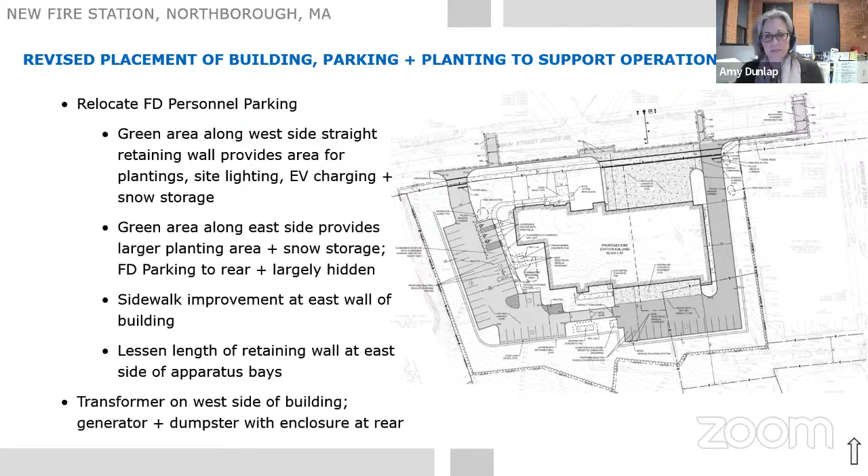The retaining walls, we also presented at the last meeting, and I just wanted to go through them to show you what we're going to be presenting to design review tomorrow. This is the straight wall, which is what we've been looking at, although it's been adjusted for the parking change in the back of the building. When we get to the cost estimate portion, the base estimate is based on a straight retaining wall like this, and then we've got alternates for a couple of the options we're going to look at.

The straight wall isn't really totally straight here - it does set back about 2 feet 10 inches from the base to the top of the wall at the high point, back in this corner. And then the overall height is the 30 feet as we've been talking about.

We did some sections through these wall options to help everybody understand what they might look like. This was something the design review committee had asked us to do to get a better understanding. We presented 4 or 5 options to the committee last time we met, and narrowed it down to 3 different options for further exploration.

The first was this batter wall option. For all of the options we're looking at, the walls on the east and west sides of the site have to be straight walls. There's not enough room between the wall and the property line to batter or terrace them in any way, so those are always going to be straight walls. The difference happens back along the south wall of the site.

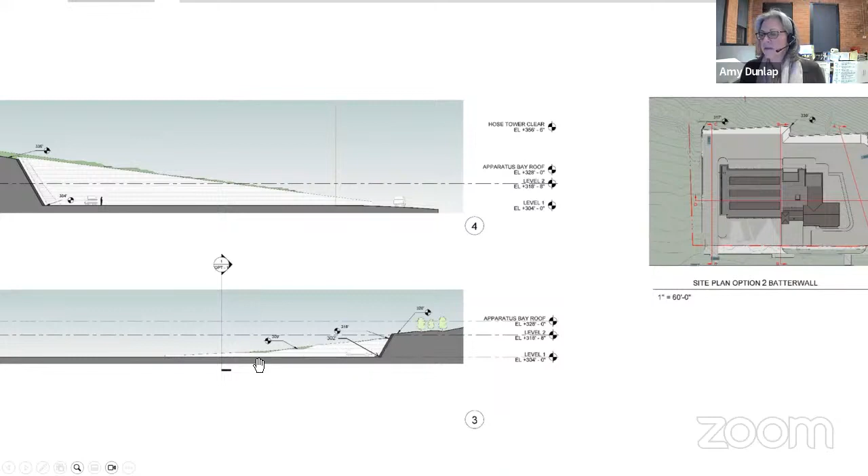This section here is cut right over here—it's off my screen, but it's at the low point of the south wall. You can see there's a car parked there. The site is about 18 feet where this section is cut and continues to go down into the corner where it's about 14 feet high, then continues to slope down along the east side of the property.

Looking at the next two sections, I'm going to show one cut right through the middle of the building in each direction—cutting through from north to south. The street is out here, the hill is up here. You can get a sense of the retaining wall; the grade is at about 304 at that point and 332 at the top of the wall.

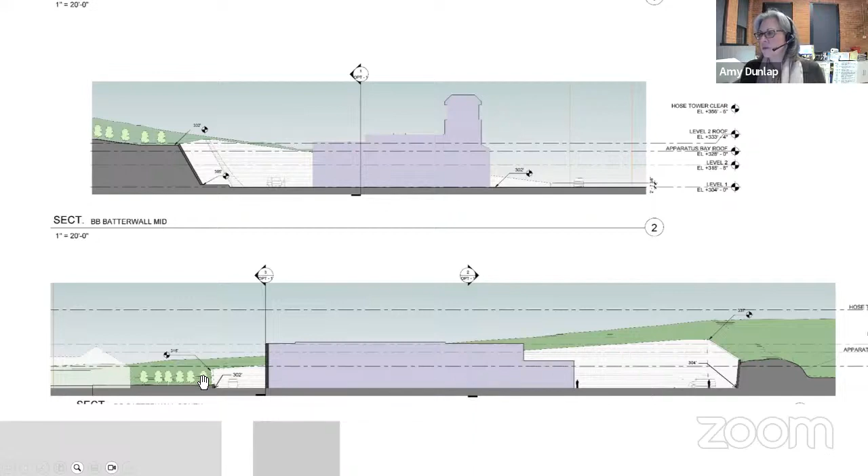This is cutting through the building, looking back at the retaining wall. You can get a sense of how the retaining wall slopes down from one side of the site to the other. So that's the batter wall option.

The next one we discussed looking at a little more is a combination of a batter and a terrace wall. In this case, we have one terrace located right here, and the rest of the south wall is battered. Looking at the section here, if I blow it up, we have the one terrace where we could have ornamental trees, shrubs, low plants, and then the wall continues up.

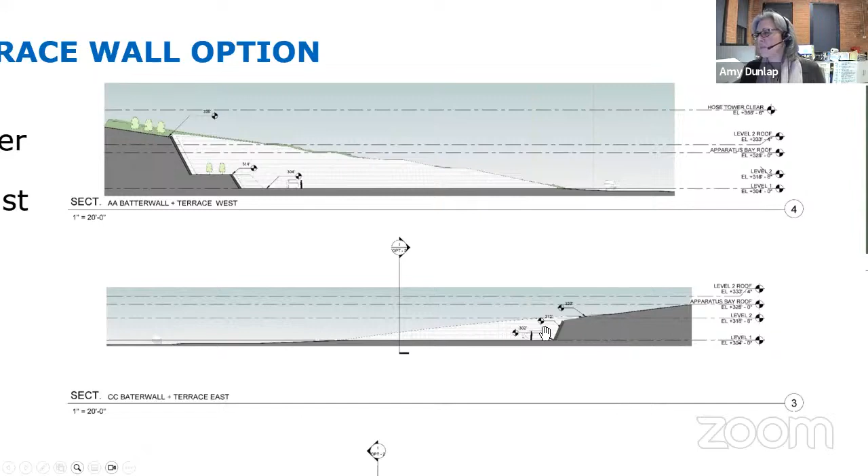Looking at the same sections we looked at before, you get a sense of that terrace here, which is at about 10 feet high in comparison to a person in a car. There's one terrace here with planting, and then we continue up. Again, this is at the low point of the wall.

Then cutting through the building at this point, we're beyond where the terrace happens and we're back to a batter wall at this location. You can see the terrace right here in the distance beyond, and you can see the terrace here in this elevation.

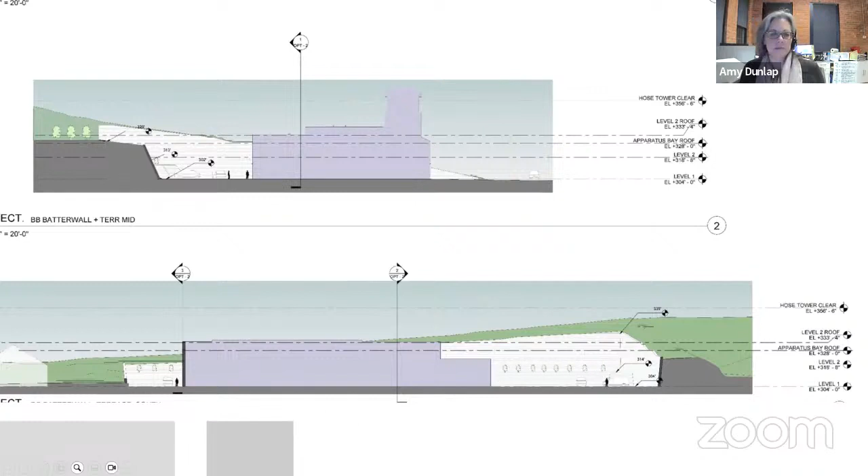This option was developed after we sent the documents to the cost estimator, so we don't have a cost for it. It's something we should discuss when we get to the cost estimate, since the estimate is done at a point in time and design continues. So we don't have an option or cost for this, but we do have one for the terrace option here.

This is the terrace option. We've got two terraces with planting beds on each of the terraces. You can see that in the section here.

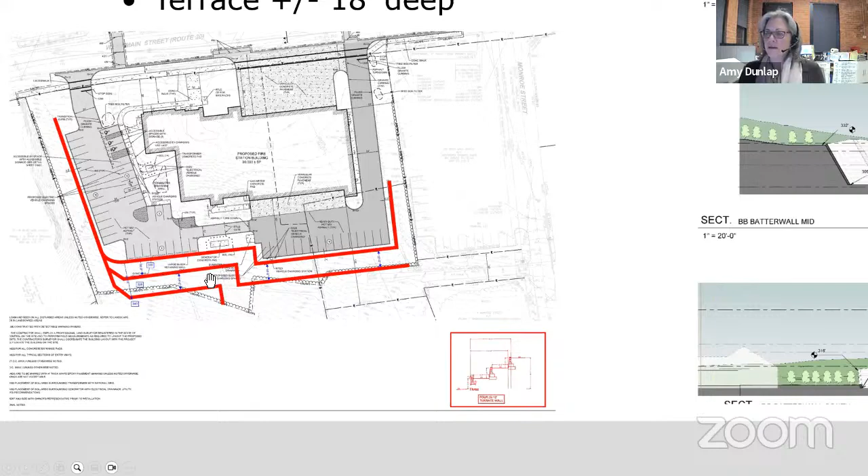One of the nice things about the terraces is that there's access into them from grade. We should note that in the previous slide, the batter and terrace wall option, there is no access into that terrace from grade along the back of the site, since there's a wall connecting the two battered walls. So to access it for maintenance, you'd have to use a ladder from the parking lot area. But in the terrace wall option, you can access each terrace from grade because of how the site is graded.

Let's see if we go to the sections here. The sections do not look right, these are not the right sections. Yeah, that's my fault, I'll find them. Okay, yeah.

Keep going, Amy. I think the next slide moves on to cost. Okay, give me a minute then. Let's see, yeah, I can find them.

Does anyone have any questions while Janet's looking for the sections? I have one question, Amy. What is the height difference in the previous terrace scheme, the little wall connecting the upper battered walls? What is that height that prevents connection to Monroe Street? Let's see, I don't know, Mark, if you know that off the top of your head.

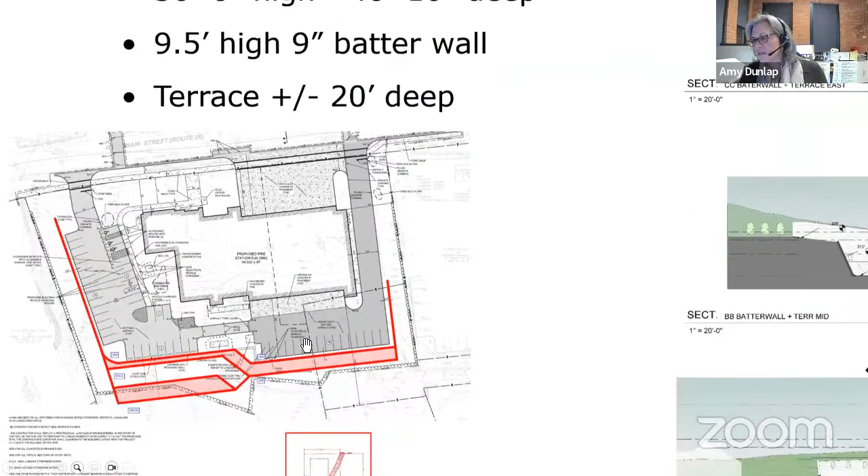These are still fairly conceptual. Let's see, so that's at 328, I think that says, and the terrace is at 313 and a half. Okay.

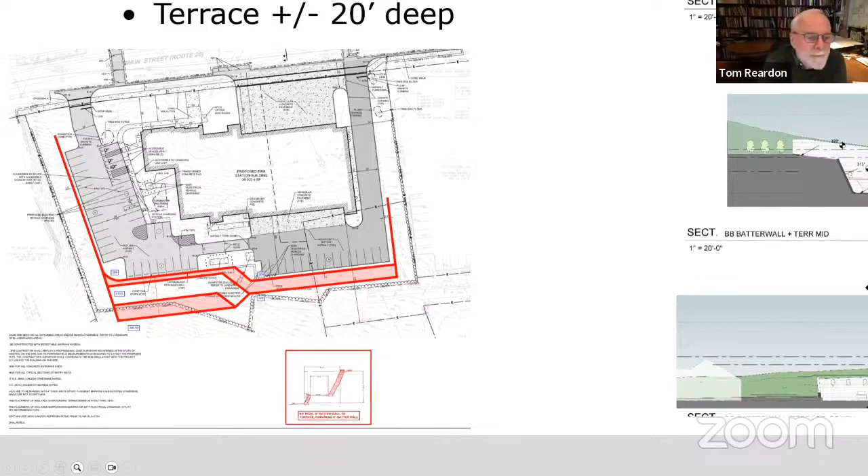Amy, I have them up on my screen. Do you want me to tell you where it is, or how are we going to do this easily? I don't know, I just copied the wrong one, so. I think I will stop sharing for a second and you can share.

And believe me, it's not fancy at this point, but tell me if you see it. The terraces. Yep, okay.

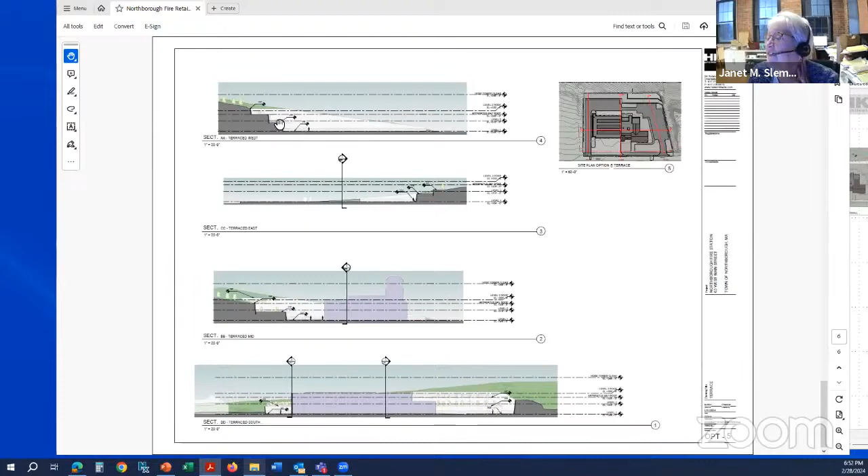So there's the plans, and this is the terrace, the two terraces at the high point, I believe, and these are at the low point. You can see the person. Let me see if I can get this a little bigger for you. You can see the people here, and those terraces are about 12 feet tall, I believe, between them, maybe.

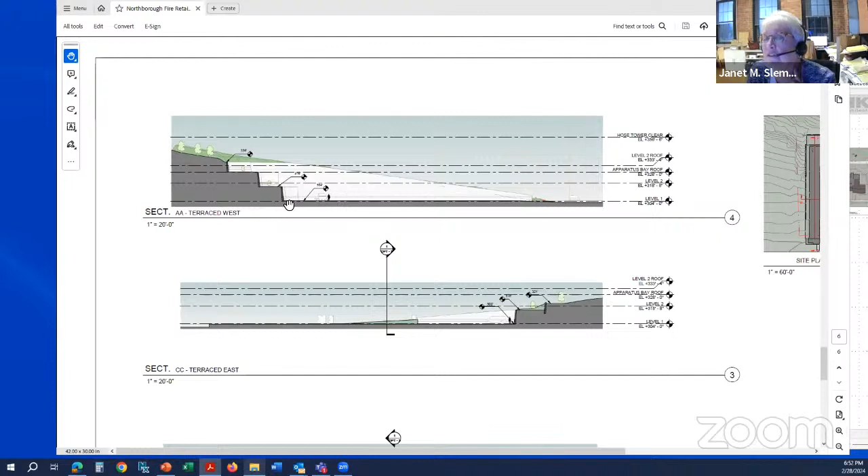And then here's the cross section through the building, and this is what you'd see. So you'd see two terraces here and one on the back side, on the east side. Is that helpful for everyone to see those correctly? Sorry about that. I noticed that Diana has her hand up. You have a question, Diana?

Yeah, I always ask procurement questions, but how does this work with the contractor who would be responsible for building the walls? Do they just provide the landscape surface and then the landscape contractor comes in and coordinates that with them? I mean, the people responsible for building the wall, since we've talked about how that's really a separate contractor or subcontractor, right? How do they engage with this landscape component that's between the vertical pieces they're building and the earth they're responsible for moving?

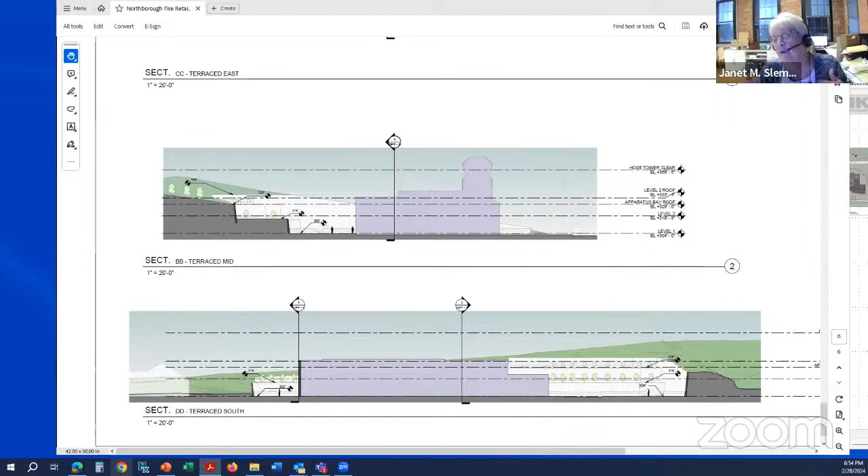We will have to confirm that, but I think it's just a landscaper that would come in. I think there would be two separate contractors: you'd have the wall contractor, and then you'd have a landscaper doing the planting in the terrace beds. And Diana, both of them are under the general contractor. They're both working for him, it's not a filed sub bid at all, it's just a delegated design. So he's hiring that person, and it's up to him to do the coordination of how the things work, that's what I'm thinking.

Yeah, so I'm going to stop sharing here so Amy can go back. I apologize for too many PowerPoints this week. Sorry, John, I see your hand. One or two? Yeah, okay. John, I see your hand.

Chief, yes, a question. Janet and Tom, is this the level of detail that, based on the last design review call, they would be expecting? In your opinion, Tom? Well, we talked about how they wanted to see a 3D rendering of the building that incorporated plantings. Right.

That will happen once we get it resolved. We've spoken, we're already in the works and planning that, but we're going to wait until something gets picked. The town does not want multiple renderings.

I think what we heard was that they couldn't understand the section through the site, so the walls looked too flat or too short to them - they just didn't have that level of detail. I'm asking your opinion, Tom's opinion - does this hit the mark? Sounds like it does for now.

Hey Amy, one last question. At what point in time do we have a better educated view on which of these wall options makes sense and that we're going to go with? After we cost it, or after our design review, or both?

I think both. So we have cost information that we're going to talk to you about tonight, and then we had talked about presenting the options to design review to get their feedback. So I think after that we need to make a decision, because it does affect the planning board submission that PAR is trying to work on and do all their stormwater calculations and all. So we do need to come to a conclusion soon.

Okay, thanks. And the cost. Okay, so we're going to talk about the cost along with Tim.

So we'll talk a little bit about the hard construction costs. The hard construction costs are the actual costs that you pay to the general contractor for building the building, and that is what our cost estimator has priced out at this point in time.

I think it's really important that we all remember that this is the schematic design level estimate, and so it's based on limited drawings that the cost estimator had from the architectural team, civil, landscape, on the MEP, FP, and structural engineer. We had outline specifications from different disciplines, and we had engineering narratives. At the schematic level, not everything is figured out. Not all the drawings are fully developed. Not all the engineering is completely done.

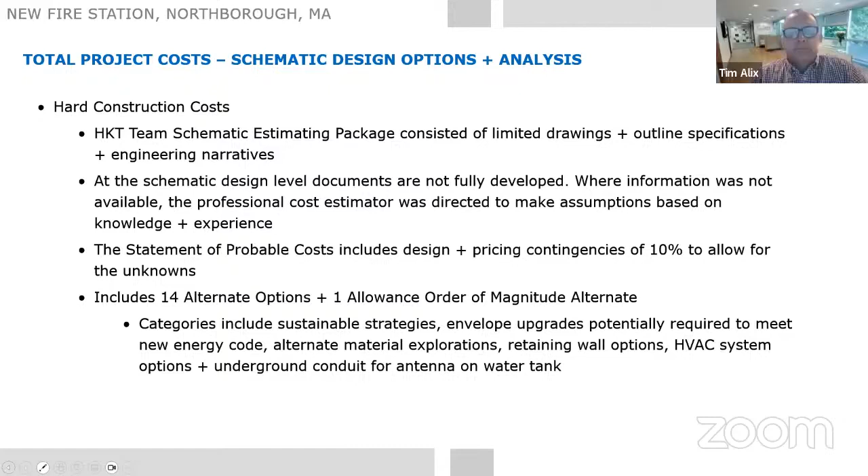And then one thing we did as an order of magnitude estimate was address a request from the fire department to plan for putting an antenna on the water tank on a nearby property. That would require a conduit run from this property out onto Main Street to Gale Street, and then onto that property with the water tank and up the tank.

We don't have a survey for the extent that conduit would need to run, and we don't have any engineering work on that. So we looked at GIS for the horizontal distances. We know there's a significant grade change, so we applied a factor to that horizontal distance to account for it. We looked at Google Earth to figure out the different surfaces we'd be cutting into, whether pavement on the street or the driveway on the adjacent property. We wrote a narrative for the cost estimator, but without drawings, he felt the best he could do was give a range of costs. So that's what we're calling the order of magnitude allowance here.

Does anyone have any more questions on hard costs before we move on? Big picture.

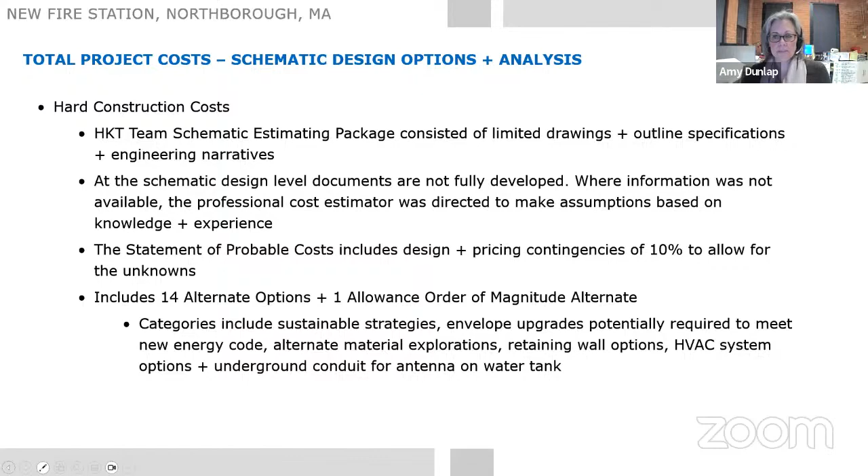Okay Tim, do you want to take this? Sure, thanks Amy. So the other component that makes up our total project cost are what we'll call soft costs. We have basically three buckets we pull those from - these are all the different things not included in your contract with your construction manager or GC, items that go into the building that you use for the program.

So furniture, fixtures, and equipment - those furnishings, AV equipment, security equipment, telecom, those items.

We also have fees and expenses - the design fees, all their consultants, your OPM fees, commissioning if you chose to commission the building. Any kind of, we'd have a line item, hopefully we don't dig into it, but legal costs. Certainly we'd have some utility assessments, and then some costs during construction for material testing.

And then we have contingency for actual construction. We'd have basically a percentage of the project cost that we'd carry for those things that come up during construction - there's always something that comes up.

And then we have another contingency that we call owner's project contingency, which a lot of times is designed for additional consultants that might be required to be brought on, but it's kind of a separate category we carry that isn't necessarily directly related to any kind of cost of implementing changes to the work.

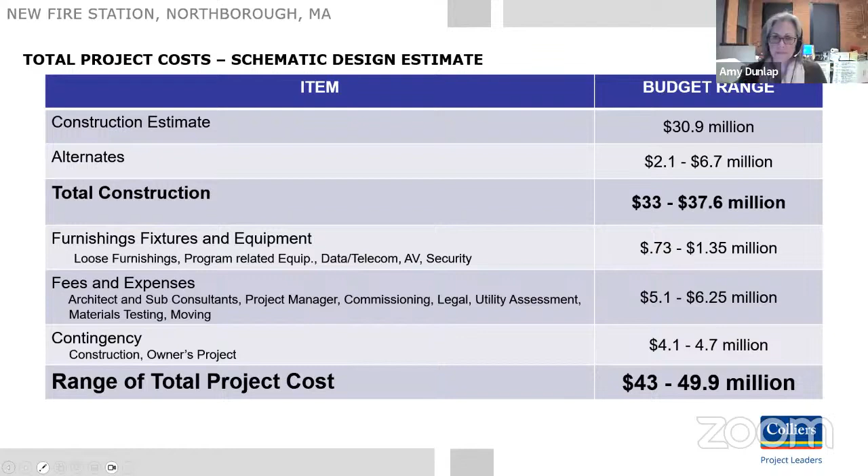So there's a lot of numbers, a lot of ways to look at it. But big picture, I was kind of surprised we were as close as we were, given the fact that the program has obviously changed. The site issues have caused some costs, but we're still pretty close to the number presented back in 2019 with escalation and adjustments. Any other questions?

John, for Janet, your line items for loose furnishings and program-related equipment - mechanicals, transfer switch, generator, that stuff would be in your construction cost. Program-related equipment is really about things like treadmills in the gym space, beds in the dorm area, telecommunication equipment, AV rack, and kitchen supplies and equipment. Got it. Yeah, if it's built in, for the most part that's included in the construction cost estimate. So if we had some built-in shelving, that wouldn't be furniture necessarily - that would be built in as part of the construction estimate.

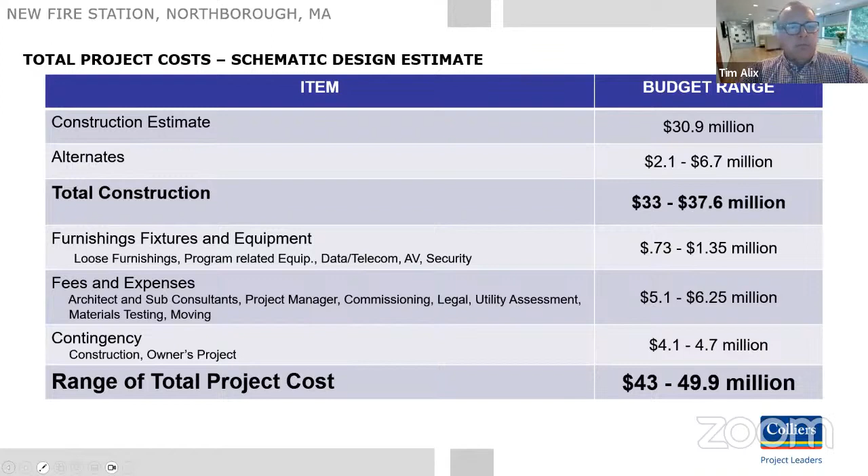Anything else on this? No, I think then just talking, Amy would take it and Janet would take it to the next level, to talk a little bit more in depth about some of the alternates that they had alluded to earlier. Okay, Janet? Amy, I'm here. Sure, she's going to lead this one.

So we put together this slide to explain the alternates. As I said, we grouped them into these different categories, so we've color coded them to help you get a sense of the categories we've got here.

So we've got the green alternates, which are the EV-ready charging stations, the PV, and the green roof in a little section of the building. But stepping back, the numbers here are estimates, and they're just for the hard construction costs. Some of these might also require additional soft costs. Some of them, like the antenna for example, we would need additional survey work to nail that down, and a little bit of additional engineering work. So it's not really in scope - this is just the impact to the hard construction costs, and they're approximate based on the level of information we were able to give to the cost estimator right now.

So we've got the green options, the energy code upgrades, which are upgrading to triple glazed windows. In some cases, if we go to triple glazing, we have to actually move to curtain wall because the storefront system can't support the triple glazing, plus adding some additional insulation in the walls. So those are things we really don't know whether or not we might need yet, but we want to have an idea of the order of magnitude so that once we get the model done, we can decide whether or not we need them.

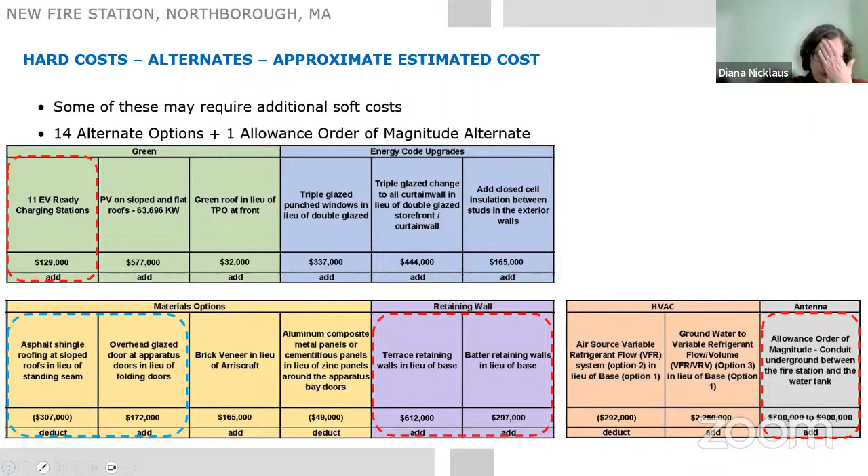So I do think, I know you guys need this number, you need the information on what to do here. To what extent are you going to carry alternates in the documents moving forward? Obviously you don't want to have a lot of them, but...

Well, I think on this one, we're going to show that we have conduit going to 11 different spots, and showing that you have a minimum of 6 that we're going to carry in our construction number, but we're hoping to get grants, and those locations would be identified. I would think that would be enough for the planning board to sign off on. Yeah, and then you can determine - usually they're an alternate - if you can go with 11.

Double-sided chargers that go between a spot or something, so maybe there's only 6 towers for 12 spots, I don't know.

Certainly if you can pursue grants and get them, whether it's reimbursement, or sometimes it's a specialty contractor that comes in as part of that grant who installs them, then you have your operational cost with a service agreement with the provider and that sort of stuff. It gets complicated, or it can get complicated.

But I think as far as the permitting process, that's why we need the decision for the planning board. So if the intent is to provide some at a minimum, but eventually hopefully we'd be able to get 11 or 12 at some point to show where they're located. Hopefully it would be enough information for them to approve the plan. And I don't know, Amy or Janet, if that gives you guys enough information.

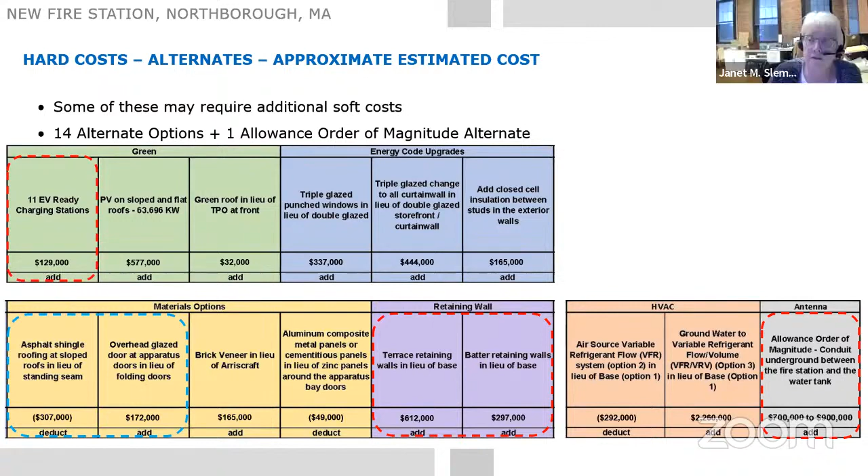Just to remind everybody, there's always going to be straight walls on the east and west sides, period. We're just talking about the southern wall, the rear wall, for that added cost, so just keep that in mind for folks, nothing else will change.

So the battered at 300, we'll say, and I'm just picking a number, it's not based on anything, but if it was, say, 450, you're talking, okay, that's between the two, it's $150,000. If you really don't want the straight wall and you don't want the terraced, really that's what you're deciding between at this point. Is there any real advantage to the battered wall besides the setback going back?

Just the way it looks. Well, I think you need to consider how much shading is provided, a straight wall versus a battered wall, because you have a high southern slope in the rear of the site. I suspect the battered wall at a greater angle might allow more sunlight to penetrate to the back of the building in the parking areas, but maybe Mark has done some solar calculations here.

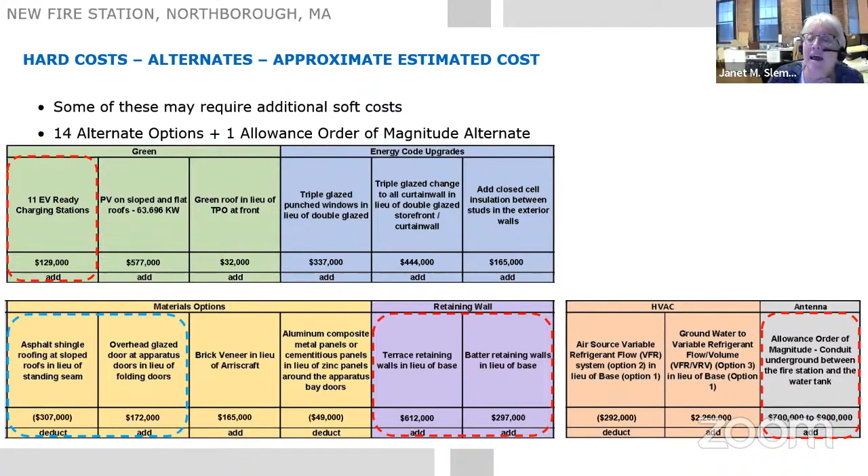I don't think so yet. Amy, could you just go back for a second? I think there are some renderings for just a second, just come back up, because it helps for people to have a visual on these again.

So this is the straight wall. At the high point here, where we have the 30-foot high wall, the wall steps back it's actually about 2 foot 10 inches from the base to the top of the wall.

And that's the base cost estimate number. And then this is the batter wall. Just thinking for a minute.

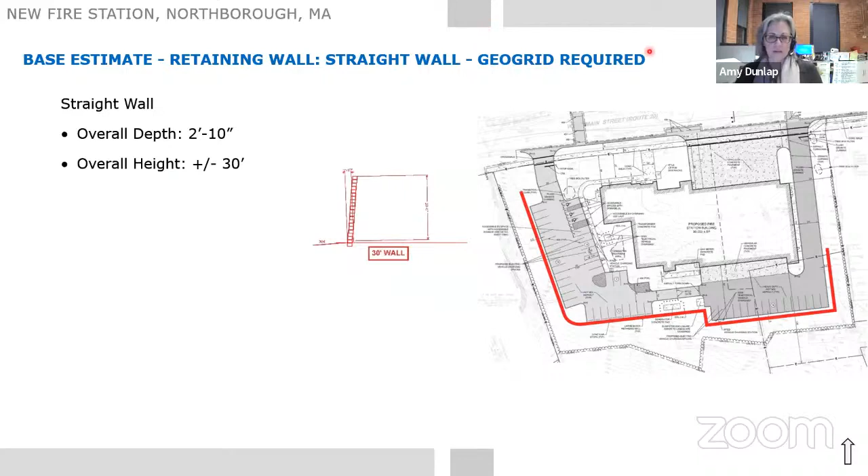So the base wall, Janet, has GeoGrid. GeoGrid is required along the entire wall, which is one of the things that adds to cost here. Where we have the batter wall, we need the GeoGrid on the east and west walls, but we don't need the GeoGrid back here.

So just so everybody understands, the GeoGrid is something that as you build up the wall, you have say a 10-foot, 12-foot, 15-foot mat that goes down and it gets interlocked between the blocks and then goes into the soil material about 10 to 15 feet. So when you backfill on top of it, it's helping to hold that wall in place. So what that requires is more excavation in order to build that style of wall. So it's more earthwork, it's just more labor, it's more money.

Will we get some details on the base construction cost, particularly in this one? I'm curious what the cost estimate is of the base wall, the straight wall. I don't have that in front of me. It's sort of buried, it's not so easy to pull those numbers out.

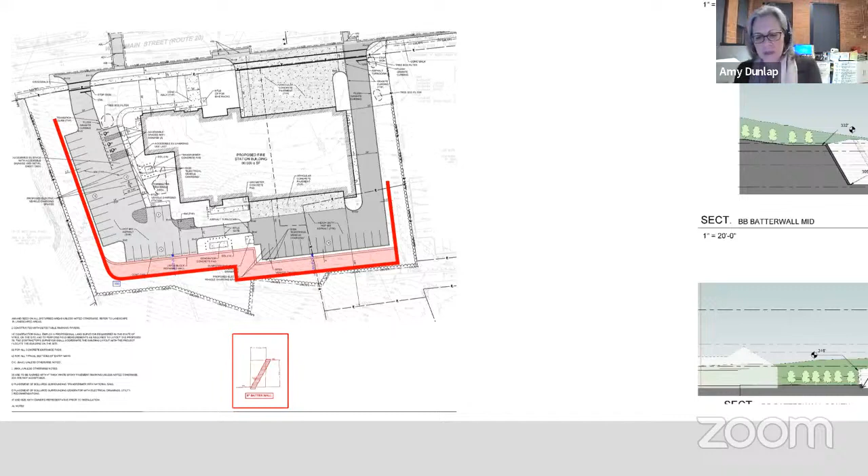I'm looking quickly to see if he has a deduct number, Janet. Obviously we can't deduct it, but it would be helpful to understand, are we doubling or tripling the cost with the $300,000 option, or are we adding 5% to that? I think you're adding - I'd have to really dig in, but I thought I saw that the base wall was about $600,000. Yeah, but that's before adding any of the general conditions and everything, but yeah, you're right.

John, I just want to remind people that some of the feedback on one or two of the community meetings where we had some of the earlier diagrams, the idea of the specter of a large wall, we got a lot of feedback on in terms of, whoa, that's pretty big. So understanding that the east and west walls are going to be straight and we can't play with them that much, there was a concern of the magnitude of the look of what's going to be there. Now mind you, the building's going to block most of that view from the street.

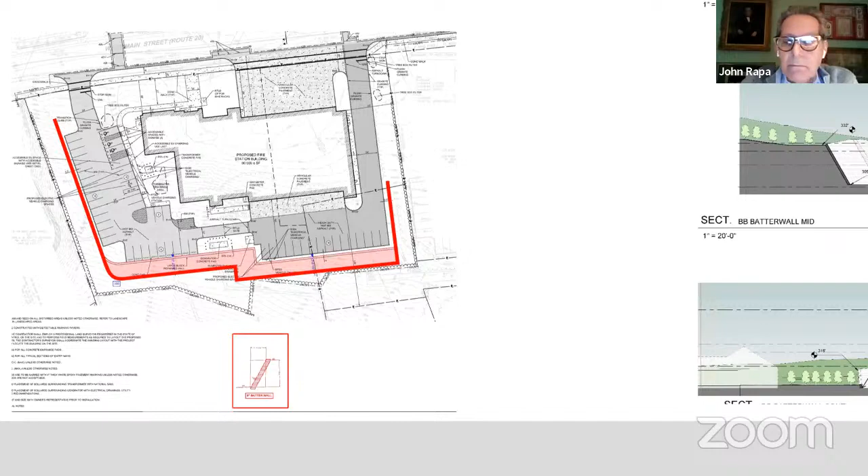Just my batter wall observation - it's also approximately a 70-degree angle, which is the altitude of the sun on June 21. So this would allow you to get some sun in the back. As the sun gets lower, you're going to get more and more shading, especially for the employee parking.

So Tom, your preference would be? Straight walls on the side and battered in the rear - this option right here that we're looking at. I'm gonna take your recommendation on that, that's what I'd go with. Yeah, that's my leaning. I think you can justify that you really don't see much of that, the building is blocking most of that rear retaining wall. And it's really just on that public parking area where you would see it - that would be your biggest opportunity to see it.

And I concur with that, Tom - it's also worth the premium of the cost.

Okay, Captain, where are you? Captain's there, he's just hiding. He's staying quiet.

I am all for the battered wall. I don't think we should look at the terrace wall if it's going to be that much more, because we're already looking at a large price tag for this project. I agree. So by agreement, the battered wall? Yes. Okay.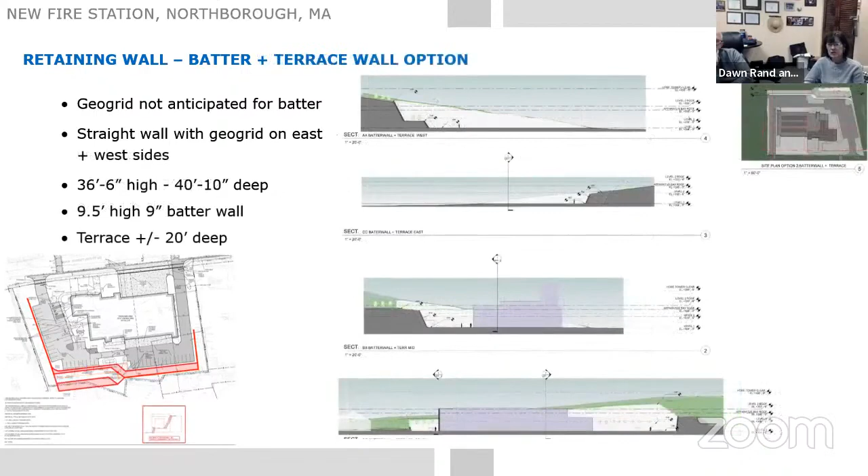All right, that takes us to the - oh, the Don, tower, antenna - excuse me, Don, I think Neal had his hand up. Oh sorry Neal. Jeff, you got your hand up?

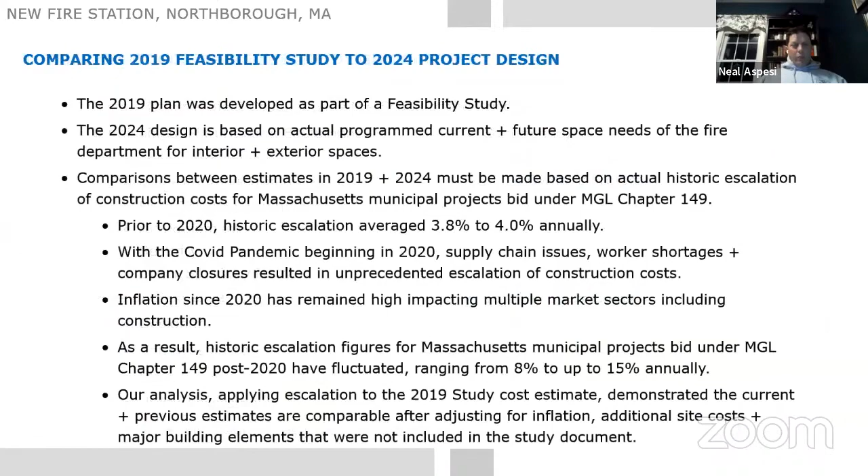I did, yeah. I just had a question on, when you're looking from the street side on the public side, you're also going to have trees in some of that area, correct? So that'll kind of block a little bit more, like along the building. Yeah, trees and such, so that'll help.

Sorry, I'm trying to get my pointer here. So yes, there would be some trees in here, so that'll help block it as well.

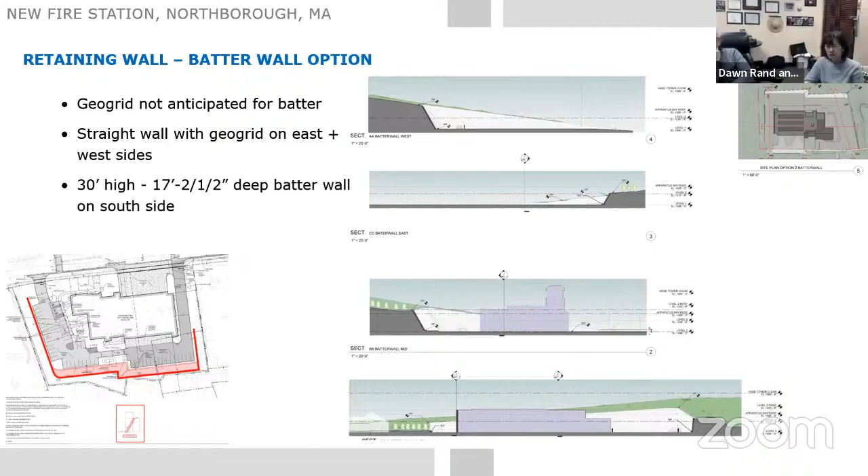Plantings. Okay, thank you. All right, so that's by agreement, and it brings us to the antenna on the water tower. I think the chief would like to address that. Yeah, because it was the chief's idea to do it in the first place.

So one of the things it was trying to address was a line of sight issue from our antenna at our dispatch center, which is at the police department, to a potentially a microwave off the top of this tower, which would provide us with some additional capabilities and improve some communications issues we have. However, in no way can I justify a cost of $700,000 to $900,000 to address that issue. And more importantly, myself and the police chief and communication supervisors are already in talks of a long-term plan to improve our communication system throughout the whole community.

So I think it would make more sense to put - and I've talked to Amy and Jenna, we talked before - that we already have in the plan brackets to put, for lack of a better word, antennas on top of the station. With that in mind, my recommendation would be we go with that. And then in the future, either through a grant process or through the process of developing, expanding, improving our communication system throughout town, maybe then we'll want to say, hey, yes, we do want to invest and we want to do it, but there may be a different way to do it than conduit.

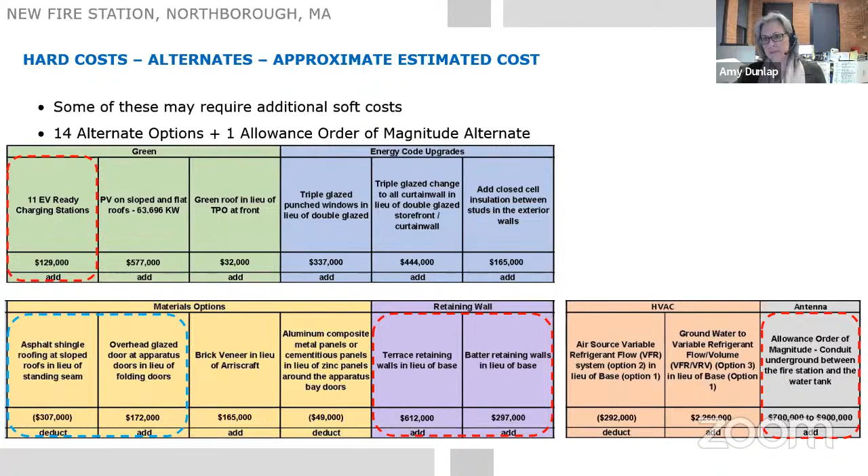Hey, that's great. Tom's got his hand. Tom, yes, I think we should include the folding doors at this time and not leave it as an open item, because it doesn't make sense to put in overhead doors for an extra $172,000 if we like the folding doors to begin with. I agree with you.

Could I just speak to that real quick? I concur.

So today myself, the deputy, and the captains were at a seminar in Worcester, and part of this seminar was a show. And there was a folding door company there, and I specifically asked them, is there a concern with folding doors in New England? Because that was one of the questions that came up from some different people. I didn't think there was, but I wanted to check.

And they said no, as a matter of fact, and they showed me all these fire stations throughout New England and Massachusetts that are going forward with the folding doors because they're better. They open inside, they operate better, they're quicker, they're safer. They said more and more companies, more and more departments are going with those. But I did ask that specifically to see if it was a problem in New England, and they said no, it's not. So just to let everyone know.

So by agreement, we'll stay with the folding doors. Agreed, yes, yes. Okay, and one last thing, I would recommend we keep the standing seam roof, even if you get better information about the asphalt.

Because if you're looking at life cycle costing for the building shell, putting an asphalt roof on is not a good idea. Maintenance, difference of materials, flashing issues. If you notice in your neighborhoods, they're all streaking because the quality of the asphalt shingles is in decline. They're disintegrating faster. I wouldn't touch it.

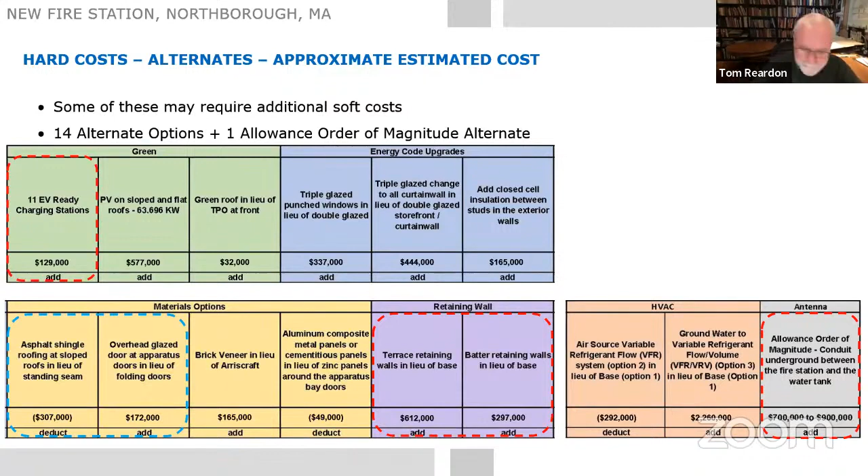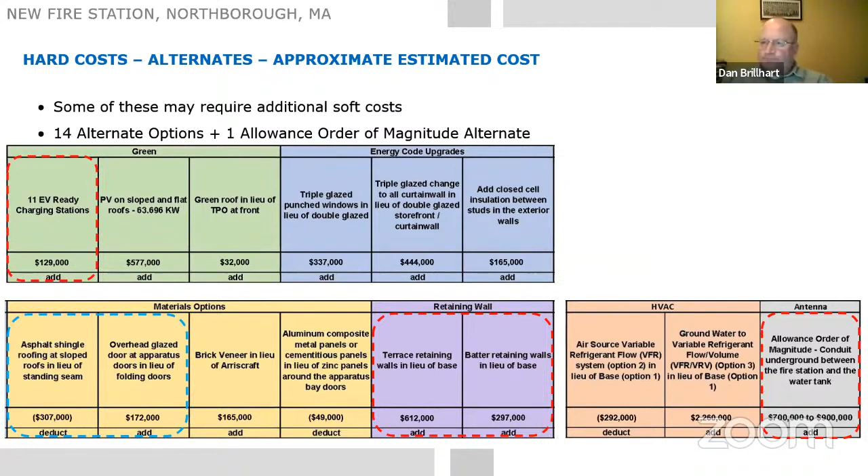Okay, does everybody want to take this up right now too? Sure, why not, I agree. Anybody else? I concur. I also agree, working in a leaky building as we do now, I like the metal roofing. Okay, so we can put that one to bed too. Great, good agreement, thank you.

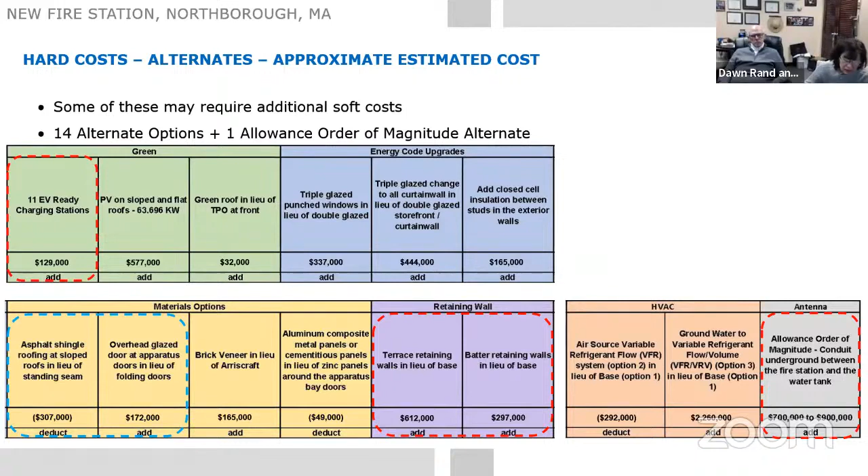Okay, all right, so the next item that we have is schematic design sign off.

Now wait a minute, we still have, Amy, you have more slides, another slide. Oh, there's more? Wow. We're not done. I like it.

So we just wanted to update you on the schedule. We've talked about some of these things. We are going to the design review committee tomorrow morning. Please come, please come.

So I do need to speak to that. I did check with the chair of design review. She indicated that it was okay for myself, the chair, and members of the design team. She did not want the other members of the committee there. She thought that was too cumbersome. So myself, I know Dawn's going to be here. The deputy probably won't, but it will be us and then the members of the design team.

I'm flattered to be excluded. So go ahead, I apologize.

No, that's great. Okay, and so the zoning board we talked about, we're preparing the package. So the meeting isn't until March 26th, but the documents are hopefully going to be submitted by this Friday to the planner. And then pending your approval, we're going to move ahead with design development.

We do have some meetings that we... Janet, I don't know if you want to talk about this. Item number 4, we had a committee meeting next week.

One of the issues remaining is we need to schedule an outdoor daylight meeting with you folks to look at brick and materials. You can't do that on Zoom, you can't do that at nighttime, you have to do that in the daytime. So I don't have a date yet.

We've had multiple meetings with brick people. They've come out to Northborough, gone to buildings, compared brick, looked at materials. We've gone through two rounds of them and we're going to have a third round shortly, searching for brickwork and contrasting materials. Before we put that in front of you, part of the design review comments is that they don't have a selection of all these materials to review, to see what we're proposing. We're saying red brick and this and that, but they want to have absolute certainty.

So that was my point to explain: you're not going to be able to have an absolute, Janet, because we don't, not until the project is bid. Unfortunately, but we'll be close enough that we'll have what we call our basis of design. We'll have the brick that we want and how it's comprised. On other towns where we have a mix of brick colors, we'll say it has to be 80% of this and 20% of that, we give them percentages, so we'll have a really good description of that brick, as well as basis of design with a named product.

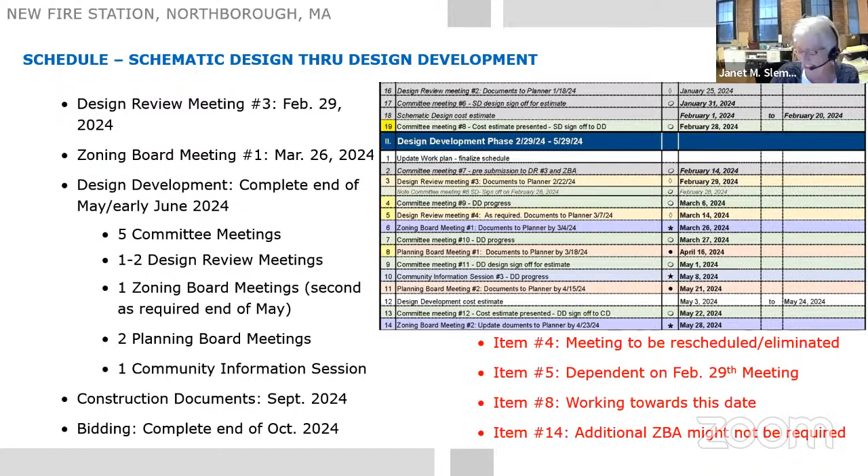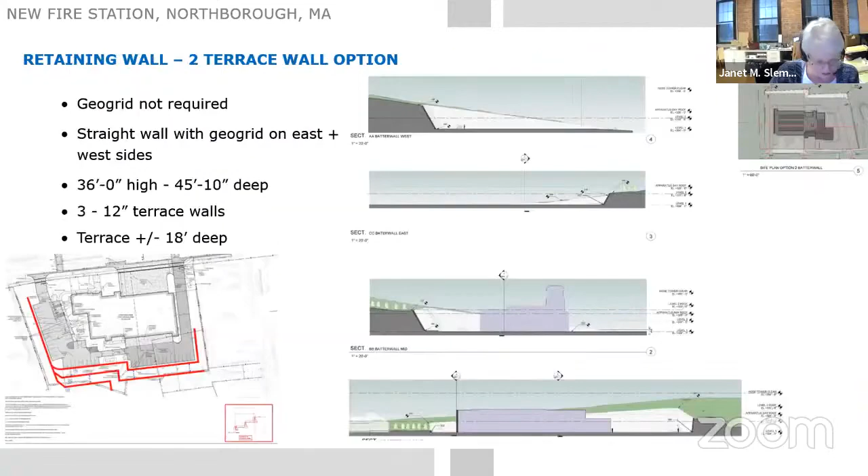So I think it's on the sign, it will be on the sign, in lettering. Mark can confirm that, but the actual number is not. I can get that in motion where we can talk about whether it's going to be 61 or 65 or somewhere in between. Okay, I'll work on that.

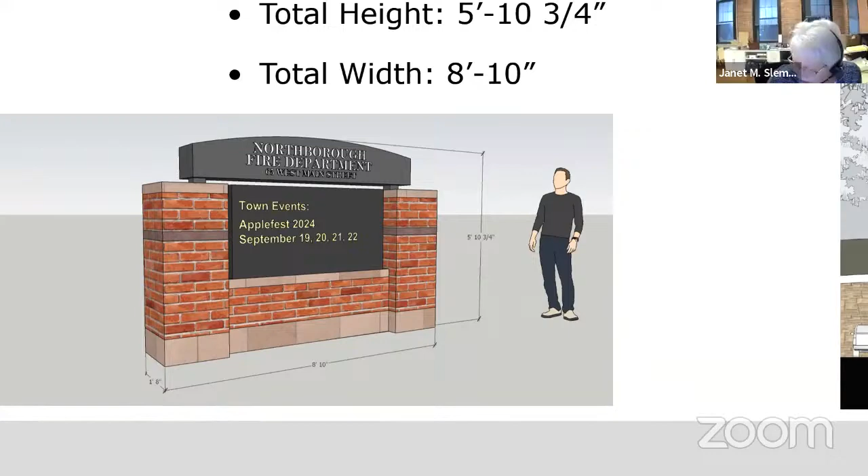We have 65, 60. I see it, we have 65 there. It might not be the correct number, but we do have it there. We show 65 West Main right now. Great, thank you. What else, Tom? That's all I have.

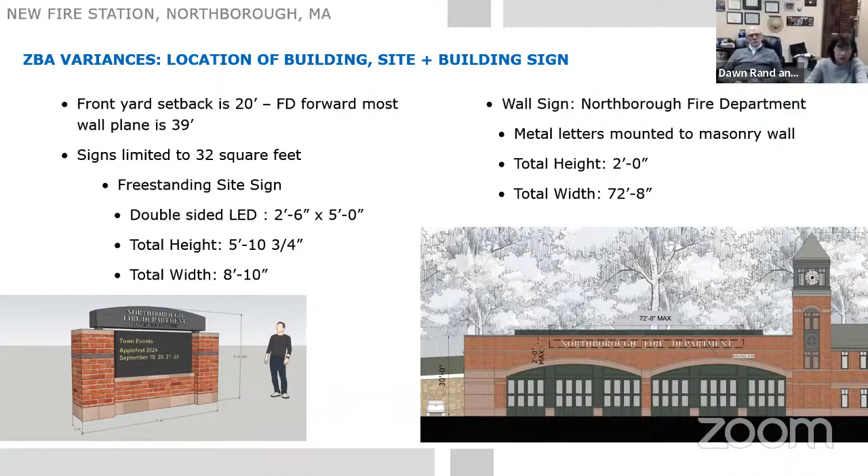Do I hear a motion to sign off on the design? A question, if I could, before that: does that prevent us from looking at any potential value engineering at this stage, as we were just talking about? I'd like to hear that from the architects. No, Dan said no, and Amy said no. For what it's worth, you can value engineer construction also. So we have plenty of time.

Do I hear a motion? I move that we accept this schematic design.

Roll call vote: Dan, aye. Tom, aye. Diana, aye. John, aye. Mitch, aye. Chief, aye.

Okay, that brings us to public comment, limited to 3 minutes and must be related to an agenda item. Chief, you've got one written comment. Would you like to respond to that? Yeah, so I gave it to you, didn't I?

Hang on, I gotta find the thing I gave her. So we did receive an email. The question was, I just watched the recording from the 2/14 building committee meeting. Before I read further, when we get these emails, we don't respond to them until we can have this meeting, so I want to make sure people know that. We're not ignoring you, but if you send us an email tonight, you won't get a response with an answer until we have a chance to discuss it. The building design looks to be coming along nicely.